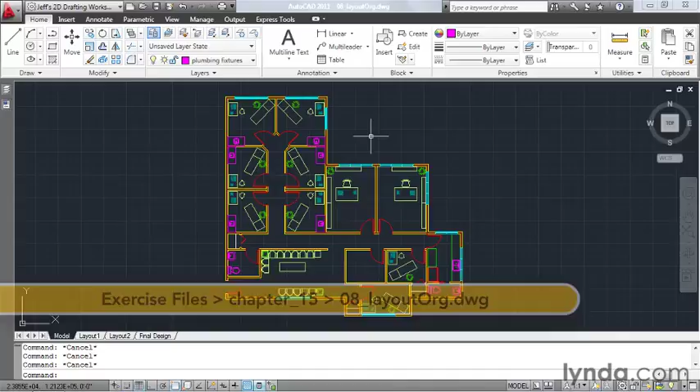AutoCAD drawings can contain several layouts. This means we have complete control over how or how much of our model space geometry that we plot. Since we can have multiple layouts, let's look at how we can organize the layouts in a drawing.

On my screen, I have an architectural example. This is a drawing of a proposed medical office. Take a look at my layout tabs. Notice that I've already copied a layout into this drawing. And if I select the layout, you can see that I've set my geometry to a scale and I filled out the rest of the title block information. So essentially, this layout is finished.

Well, except for the name. I called this sheet OV1, so I'd like to rename the Layout tab as well. To do that, I'll double-click on the tab name. I'll call this OV1, and I'll press Enter. Notice that I also have two other layouts in this file. You can have as many layouts as you want in your drawing.

If you have several layouts and you don't like the way the tabs are arranged, you can click, drag, and release the tabs to change their order. Now, these two generic tabs are currently unused, so I'd like to delete them. To delete a layout, you can right-click on the tab name and select Delete from the menu.

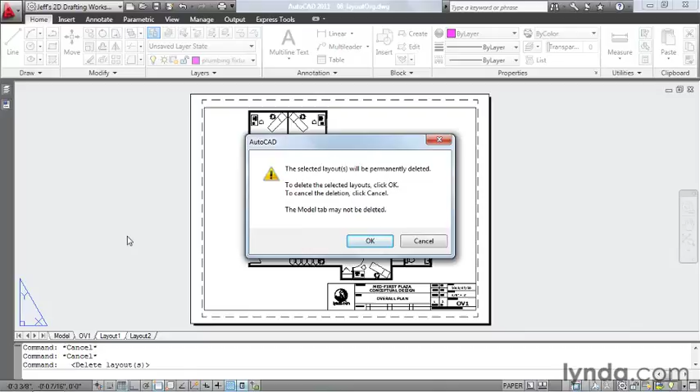And you'll get a warning saying, hey, you're trying to delete a layout. Do you want to do this? Yes, I do. I'll click OK. I'm going to do the same thing to delete Layout 2. No sense keeping layouts that we're not using.

Now, maybe I'd like to create a new layout similar to this one. And maybe I'd like to use this layout to focus on one of the exam rooms. I'll start by creating a copy of this layout. To do that, I'll click and drag on this tab name, and then I'll hold my Control key and I'll release my mouse button. If I select this tab, you can see it's an exact duplicate of the original layout.

From here, I will change the scale of this viewport to focus on this exam room. I'll start by opening the layer control, and I'll turn the viewport layer on. Then I'll double-click in the viewport. I'll come down and unlock it, and I'll pan this over to center the exam room inside the viewport.

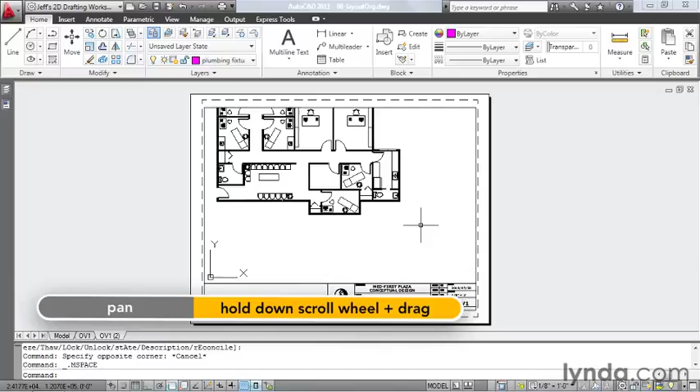Now I'll change the scale. Let's try 3/8 inch equals a foot. That's not bad. I think I can go larger. I'm going to try 1/2 inch equals a foot. That looks like it'll work well. I'm going to recenter this, and then I'll immediately come back down and lock the viewport. Now that I'm finished, I'm going to jump out of the viewport by double-clicking outside the boundary.

As I look at this, take a look at some of this extraneous geometry that we're seeing outside the room. Remember that a viewport is a window into model space. Watch this. If I select the viewport boundary, I can adjust its size using these grips. I'll click this grip, and I'll pull it up to here. Now, I'm being mindful of my running object snaps. In fact, I'm going to turn those off momentarily.

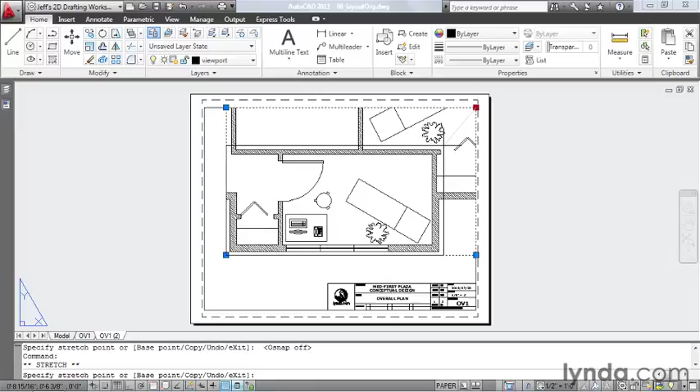I'll pull the viewport corner up to here, and then I'll grab this corner, and I'll pull it down to here. When I'm finished, I'll press Escape. By adjusting my viewport boundary, I was able to focus on exactly the geometry that I wanted to see. Let's turn the viewport layer back off.

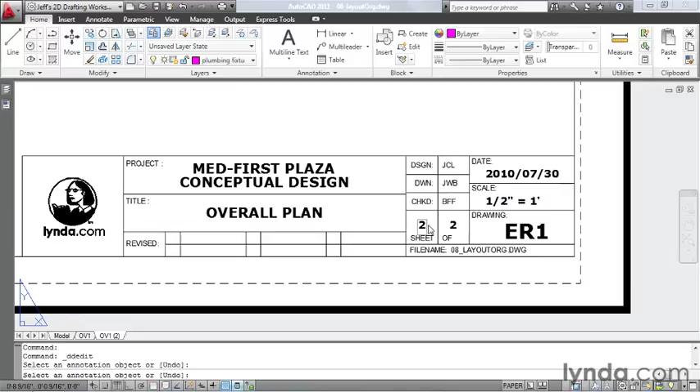And now I need to take care of some housekeeping. Let's revise some of this title block text. First of all, I'll change the scale. This is 1/2 inch equals a foot. We'll call this drawing ER1. This is going to be sheet 2 of 2. And I'll call this Typical Exam Room. Finally, I'll do a zoom extents, and let's rename this Layout tab. I'm going to double-click, and I'll change this to ER1.

Using these layouts, I'm able to take my model space geometry and create two separate plots. AutoCAD drawings can support an unlimited number of layouts. With a little organization, we can take the same model space geometry and plot it any number of ways.